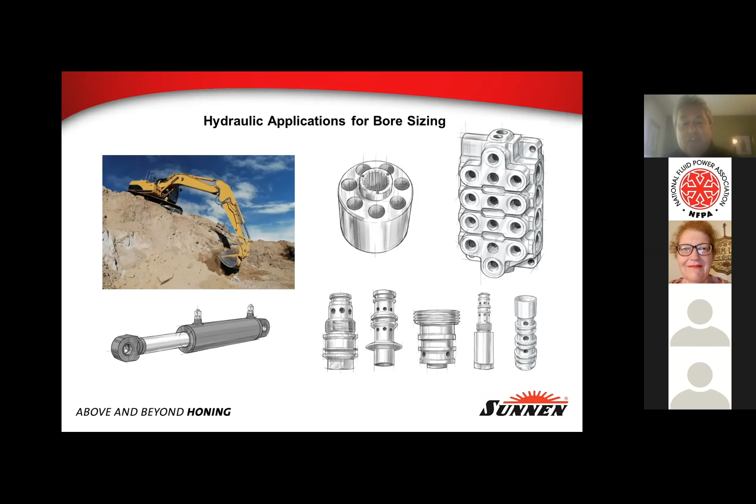As Tom mentioned, we're going to talk about hydraulic applications for bore sizing - wobble pumps, cartridge valves, spool valves, hydraulic cylinders all fit the bill. I like to tell people at a barbecue or party, when they ask what Sunnen does, I always tell them we make holes better. With hydraulic valves, piston type pumps, and cylinders, as all of you know, there's a demand for closer tolerances, better fits between the piston and valve and the bore to reduce internal leakage, improve the performance of the component, as well as having surface finish control for seal life and performance.

These design goals can be achieved with a variety of bore finishing methods. These are all secondary machining operations, obviously, after you've machined the part in a CNC machine. Then you can move to a honing operation or grinding, etc.

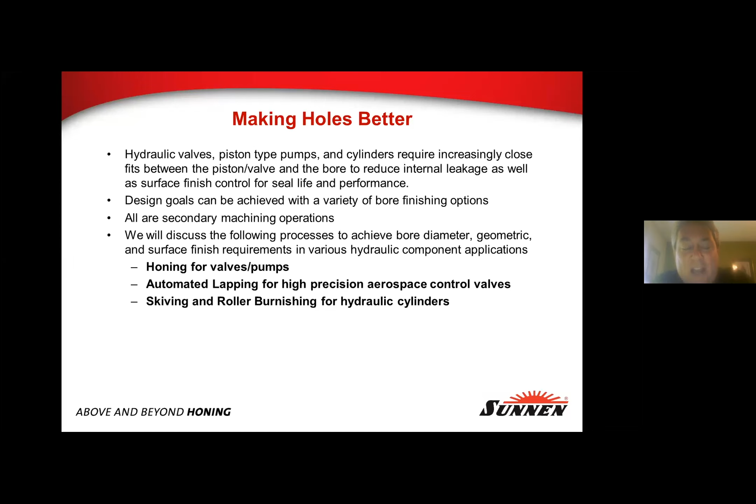So in my presentation, we're going to talk about some of the products our company produces. We've been in the honing business for 96 years - 4 more years and we'll hit that 100-year mark. We're still privately held, headquartered in St. Louis, Missouri. We've branched out into automated lapping for high-precision aerospace control valves, and also skiving and roller burnishing for hydraulic cylinders.

I like to start out presentations with a slide - many of you know this already, but I think it's interesting - about what is a micron. Of course, being 59 years old and growing up in a variety of industries, I would prefer 40 millionths versus a micron, but it just gives you an idea, from a human hair all the way down to somewhat applicable now, viruses, and how they compare in size, helps put in your mind what we're talking about when we get into these tolerances.

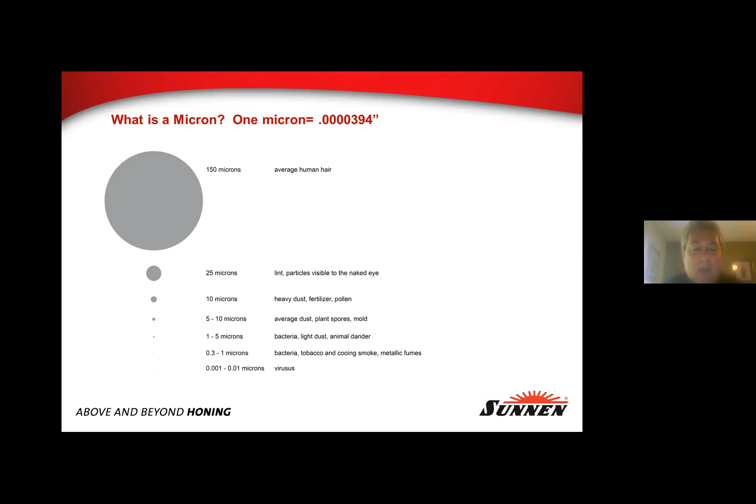So as I mentioned, honing is a secondary abrasive machining process which follows the hole creation to achieve better bore geometry and surface finish. It's an effective alternative to ID grinding, precision and hard turning, and reaming. There are actually 2 types of honing - many of you probably have both types in your facility. There's what we call single pass or single stroke hone, and then multi-stroke honing, which is the classical type of honing.

The selection is dependent on several factors, which we'll get into later. Honing can correct numerous bore conditions, but it cannot change the center line of the part. The tooling follows the center line of the part. It can create a desired surface finish. The honing solution can be extremely simple or extremely complex, depending on the part requirements. The key parts of this process all have equal importance.

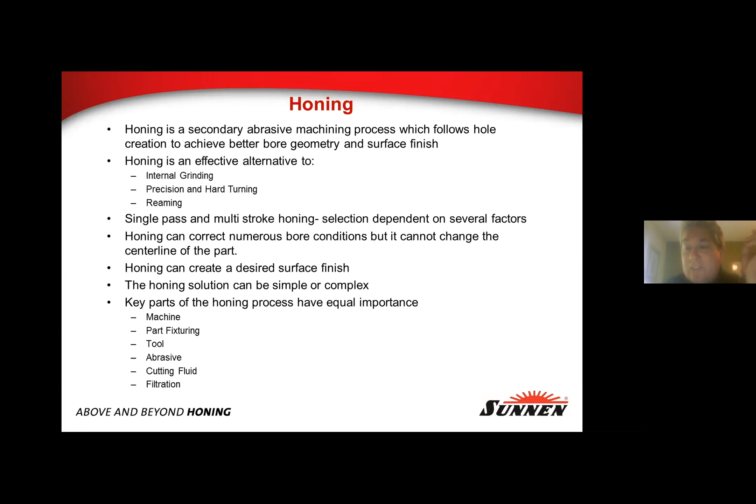My favorite part, the machine, of course, part fixturing, the tooling selected, the abrasive for the job, very important, the type of cutting fluid, and then cutting fluid filtration.

This chart, and the next two slides, talk about typical honing capabilities, what we see in the marketplace, the competitors, what the state of the art is at the moment. Diameter range, 60 thousandths to 60 inches. Bore lengths up to 47 feet. These are typically large pieces of tubing for the energy industry, which of course is not doing well either at the moment.

These are big pieces of tubing that are honed out for instrumentation purposes. Bore configurations: open, keyway, blind holes, multi-landed as with many valves, ported. Materials from Alnico to zinc, hard and soft steels, aluminum, zirconium, then exotic alloys, titanium. We hone carbide, glass, ceramics, and various types of coatings. We're actually doing a lot of work in that realm at the moment.

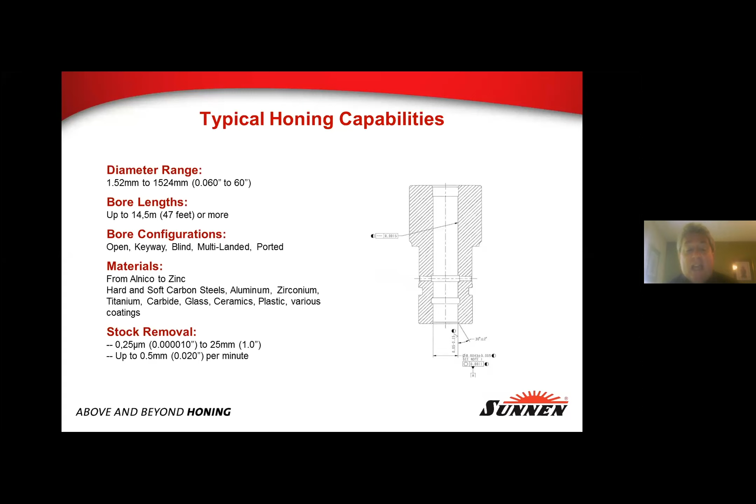Stock removal can be 10 millionths to an inch, up to 20 thousandths per minute. Size control: this is where honing can help make the hole better.

We can hold tolerances to about 50 millionths. To back up a little, it is very application dependent. Many factors play into what you can do, from how tightly you have to grip the part to remove the stock, which can cause distortion, affecting all of these characteristics.

Roundness to 30 millionths, straightness to 65, cylindricity to 80, and then surface characteristics. With RA, RZ, we can create plateau finishes, often used in the automotive industry. And crosshatch angle: we can control that with honing to 20 to 120 degrees, plus or minus a degree, for oil retention in the bore and seal life. We've even had difficulty sometimes with customers with seal noise in a hydraulic cylinder.

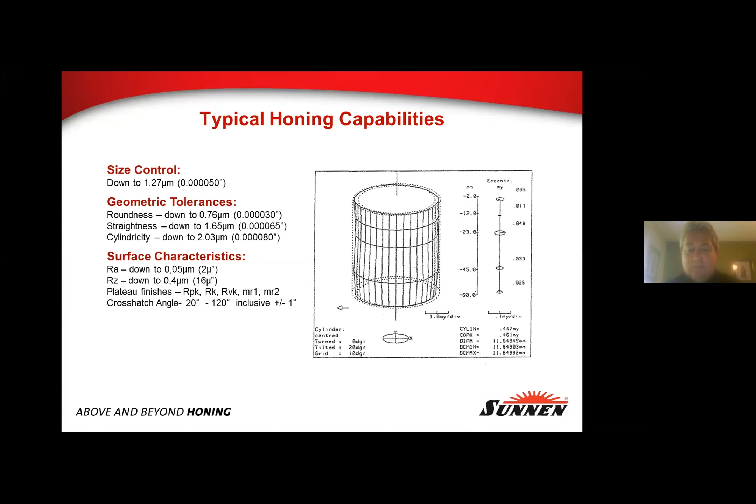These are some of the typical bore conditions that can be corrected by honing: barrel shape, bell mouth, boring marks, tandem bores. As mentioned, it follows the center line, but you can help create straightness with those bores. Out of round conditions, what we call rainbow, reamer marks, tapered parts - these are all coming from the upstream process. Undersized components, obviously, and waviness in the bore.

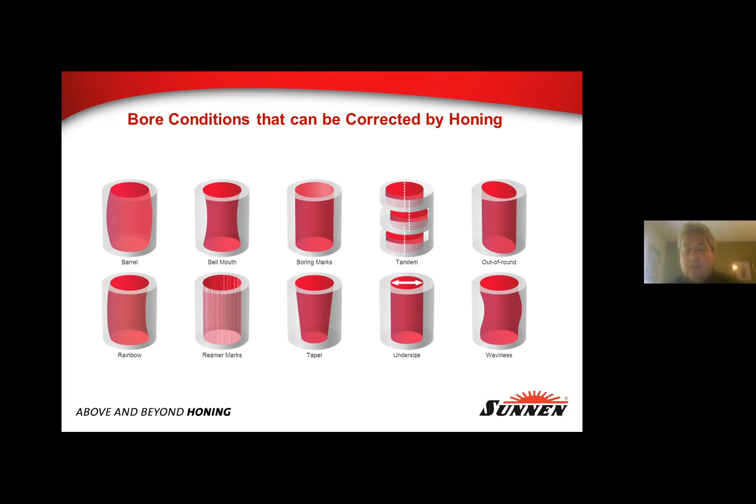Now, as I mentioned, there are two different types. Multi-stroke, which is classical honing. Either the tool or the part has to float in honing. The part is then fixtured or held in place to react out the torque imparted by the abrasive working the bore. The tool comes down and moves into the bore.

It's rotating. The tool is also stroking back and forth, and the abrasive is being expanded by the machine through a variety of different feed systems. So you've got three things going on at once while it's going up and down in the bore - that's where the material removal occurs.

At the end of the cycle, whether you're honing to time, or using our automatic size control system on some machines where a hardened carbide plug drops in and shuts the machine off when it gets to the right size. We also have air gauging integrated in, where the air gauge feeds back to the machine that it's at the right size. So there are many methods of doing that.

Obviously, basic things like just stopping and measuring the part in some applications. Depending on the amount of stock you need to remove to get the bore to the correct geometry and surface finish requirements, you may have multiple operations - a roughing operation, then a secondary finishing, sometimes a third finishing operation, and even an abrasive brush run through the bore, especially with ported parts, to clean any burrs that accumulated in the ports, which affect fluid flow. So it's dependent on your part and requirements whether you can do it in one step or maybe four steps.

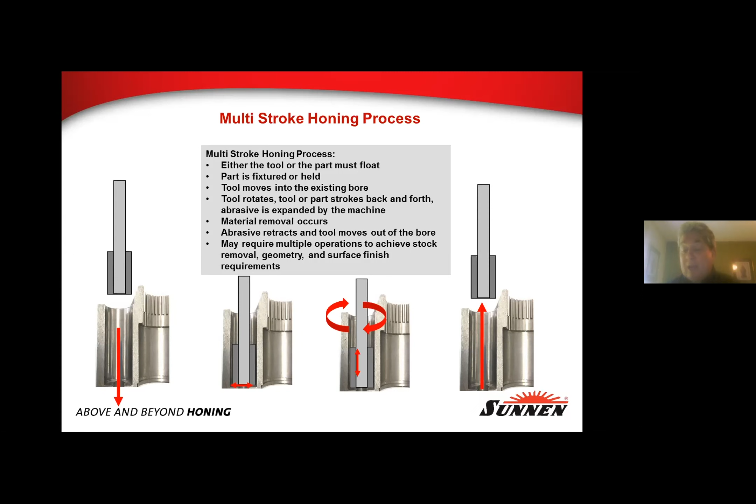Now I'll talk about single stroke honing. Single stroke honing - hey Phil, we have a question.

A question came in through the chat: what is plateau finish?

I've got a slide on that coming up, but what it is, you'll have a bore where the abrasive has created grooves, valleys, and what you want to do, as I mentioned, typically in internal combustion engines for piston rings, is knock the tops of those peaks off. So after honing, we'll take an abrasive brush and go up and down in the bore a couple times, and that cleans off the tops of those peaks. It does not typically affect the crosshatch, depending on the abrasive being used. But it's typically used for piston ring sealing in internal combustion engines.

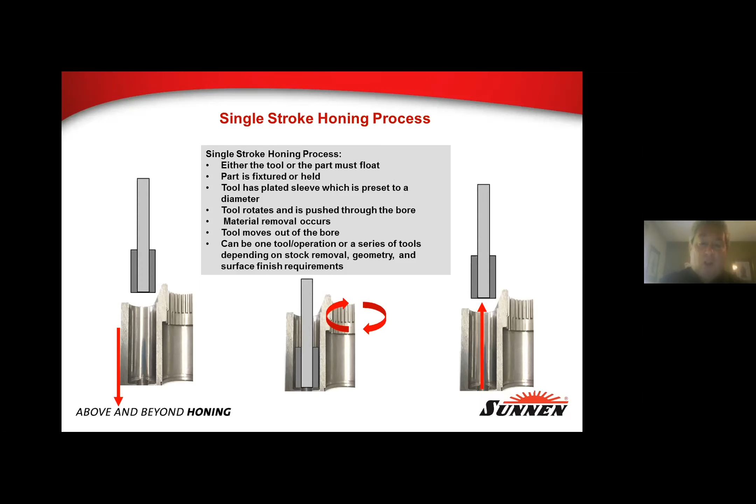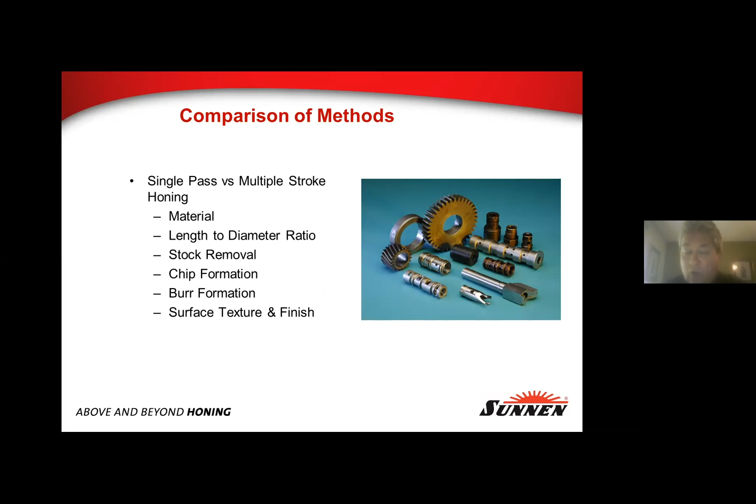So a comparison of the methods, single pass versus multi-stroke. The things that come into play are the part material, the length to diameter ratio, the amount of stock you want to take out, the chip formation that occurs—which is material dependent and stock removal dependent—burrs, which are critical of course in hydraulic components, and what type of surface finish and texture you're wanting to hold, because there are limitations.

With multiple stroke honing, materials are really the gamut, depending on the abrasive selected. With single pass honing, what you're looking for success is materials that produce small chips—and we'll get into why that's important—those are cast iron and powdered metals, which are excellent candidates for single pass. Ceramic, glass, graphite, you can envision that they all produce small chips when you're machining through that. Now limitations are softer materials: aluminum, brass, stainless, Inconel.

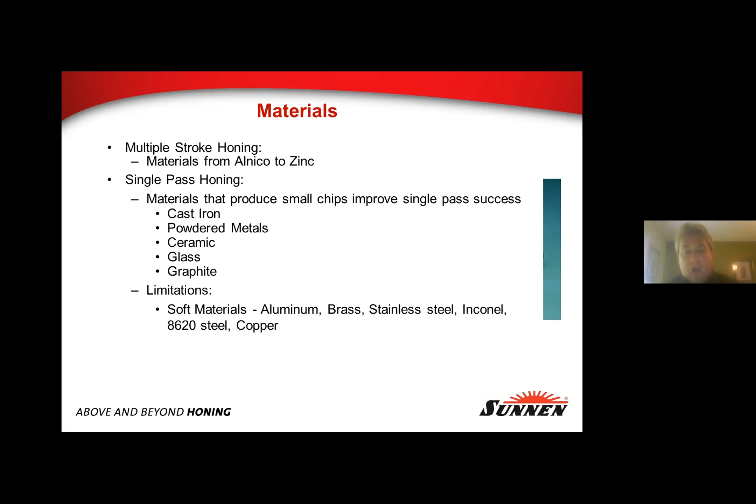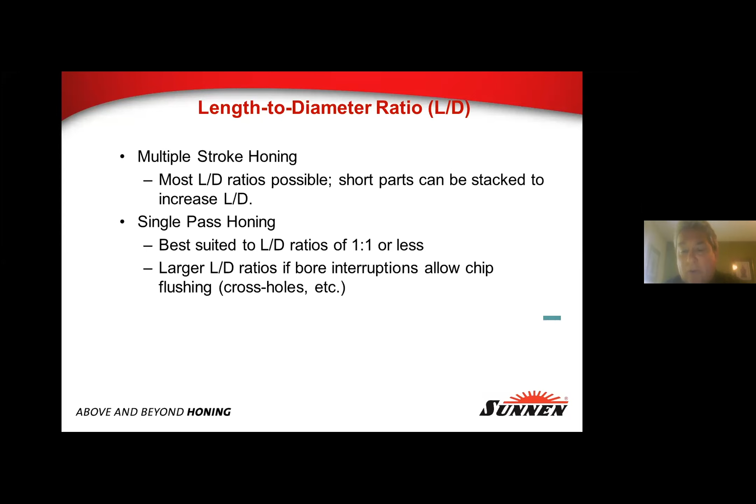These cause stringy chips, which cause problems for single pass. Length to diameter ratio: for multi-stroke honing, really anything's possible. If you have very short parts, for instance a connecting rod for a small 2-cycle gas trimmer or chainsaw, the part can become unstable. However, you can stack them, same with gears. So with multi-stroke honing, it's very flexible depending on the fixturing. With single pass, it's best suited to length to diameter ratios of 1:1 or less. Larger ratios, if there's bore interruptions, allow chip flushing through the cross holes and such.

Now, burr formation, which is very critical especially with hydraulic ported components. The least burr is with vitrified abrasives and multi-stroke honing - that's your least risk of creating a burr. Larger burrs are with metal bond abrasives and multi-stroke honing. The largest burr created is with a single pass diamond hone.

With honing stones, we'll get into more detail in a bit, they wear away and are constantly exposing new grit, which continues to cut. So you've got multiple layers of free cutting grit being exposed. Whereas a single pass diamond tool has one surface of diamonds which have been selected depending on your stock removal and the surface finish you want for the part. As I mentioned, you may do it with one pass, or you may take 6 passes of that part progressively getting bigger. The single layer of plating cuts less freely as it wears.

As you can imagine, you've got this layer of pointy diamond that works great when it's brand new out of the box, cutting away. As wear occurs with the diamond, it doesn't pull the diamonds out because there's nothing under them to expose new diamonds, just a single layer. Then it becomes harder cutting. The surface finish can become finer with this, and you get burrs in hard and soft materials that form, especially in your ports.

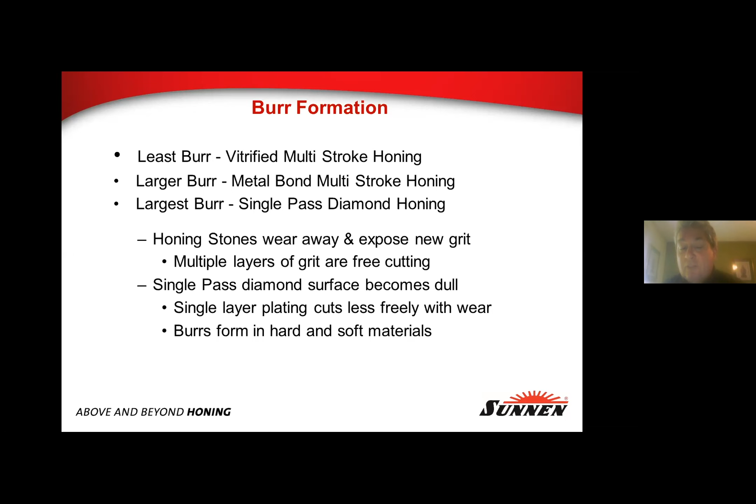So surface finish, with multi-stroke honing, as we mentioned, you can control the crosshatch if you have requirements for seals. You've got good bearing surface and oil retention. And as I talked about how the abrasive works, it's consistent over the entire life of the stone and the tool. Whereas single pass honing, you get a tight helical surface texture pattern, which is very evident when you use this for parts, and it may be acceptable - progressively finer surface finish as this single layer of diamond gets worn smooth.

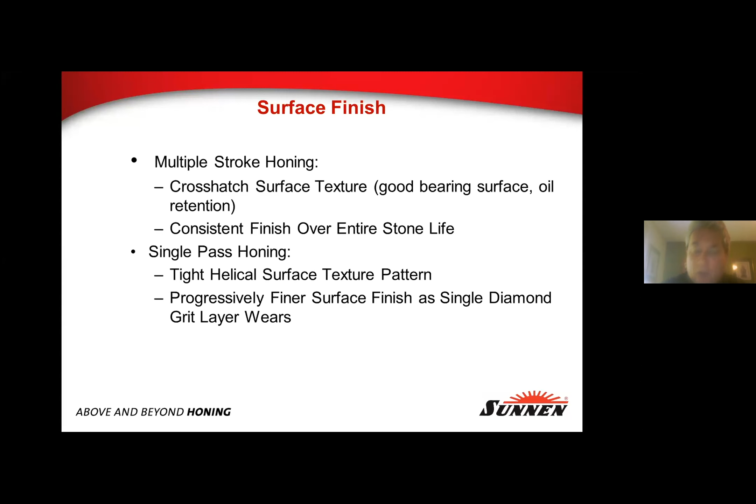So back up a bit. If your part is a candidate for single pass honing, it is by far your lowest cost per part. As I mentioned, out of a good set of tools you can get 100,000 parts, but you just have to be careful - and our application experts can help with that - is the part the correct candidate for this type of operation, or do you need to go with the multi-stroke operation?

Now we're going to get into the bits and pieces of the honing solution, and my favorite part, there's lots of machines. So you've got horizontal machines, vertical machines, tube honing machines, as I mentioned before, and those can be used for hydraulic cylinders, either production or repair, as well as in the energy industry with these huge pieces of tubing used in oil wells. And then you can actually have a human who's the honing machine. For some applications, very large parts and repair, you can take a drill and you're the machine, stroking it and honing the material out with a portable type tool.

The selection depends on the following. The primary thing is, what is the required process to hit your dimensional requirements and your surface finish requirements? It could be one step, it could be 4 steps as we talked. The part shape, size, and weight - obviously if you have a part that weighs 30 pounds, some big cast iron spool valve assembly, you can't put that on a horizontal machine because the weight of the part would be difficult to fixture and keep. The weight would not be working with you. You'd want to work with the vertical application.

Production volume: you can have a small manual machine, maybe you're making 10 parts in your prototype department - you just need something flexible to make a few parts - all the way up to creating hundreds of thousands of parts annually for high production work. Tooling requirements, the same thing - we'll get into that in a bit too. There's tooling that's well suited for low production runs, and then you've got extremely high production tooling that is hardened, machined, with super abrasives used in it that can last for hundreds of thousands of parts before it needs to be reworked.

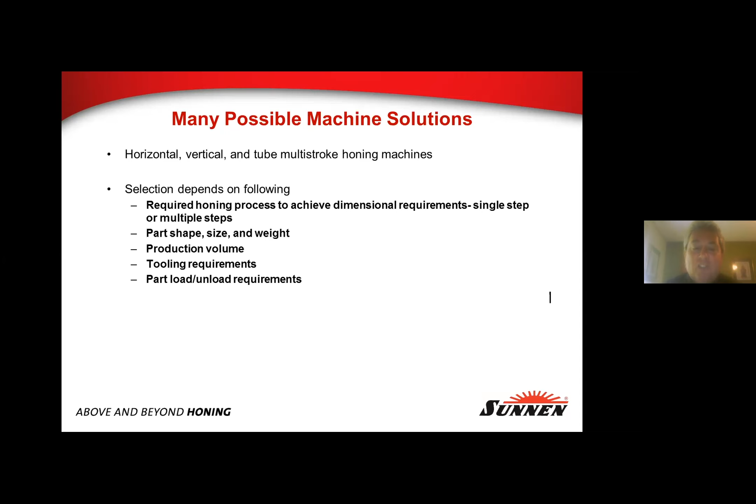So this recipe, if you will, is critical on so many different things that have to be analyzed to create the most cost-effective solution to make sure that your costs are minimized to create the part that is for your application. I've got a few slides here just showing from our line of machines to give you an idea of the variety.

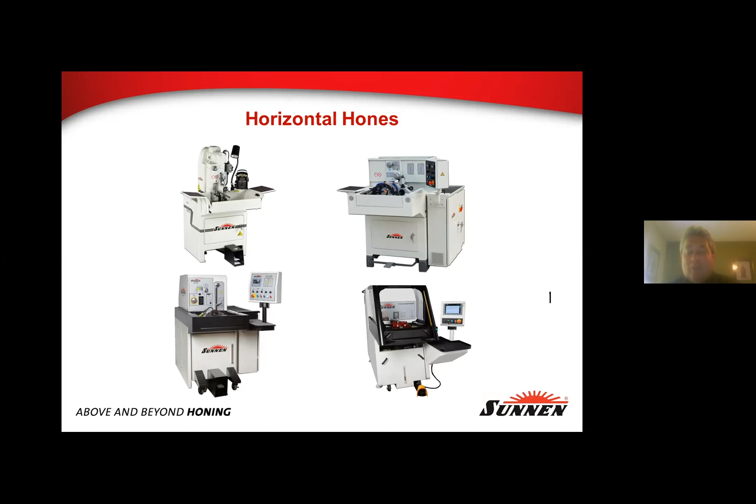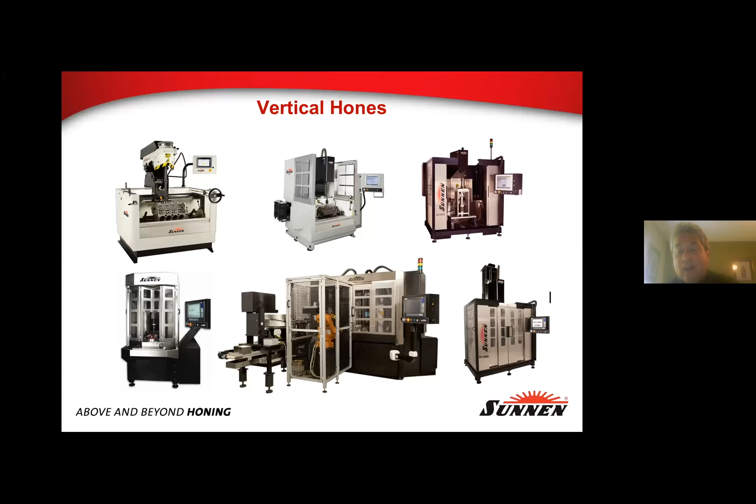Then we've got in the middle at the bottom an automated solution. That's a 3-spindle machine because that's the number of steps it would take for this particular component. We've got a robot, we've got a pressing station, perhaps a cleaning station.

And then I talked about tube hones. We make a variety of tube hones, as do our competitors, for different applications.

Now we'll get into the real key to success. The abrasives, tooling, and cutting fluids, these are all working together.

And just to give you an idea of the complexity, and this is just at my company, we actually have approximately 7,200 different types of tools you can order, 21,000 different abrasives, and 19 different water-based and oil-based coolants that are required. So once again, it gets back to your application and honing in, no pun intended, on the right solution.

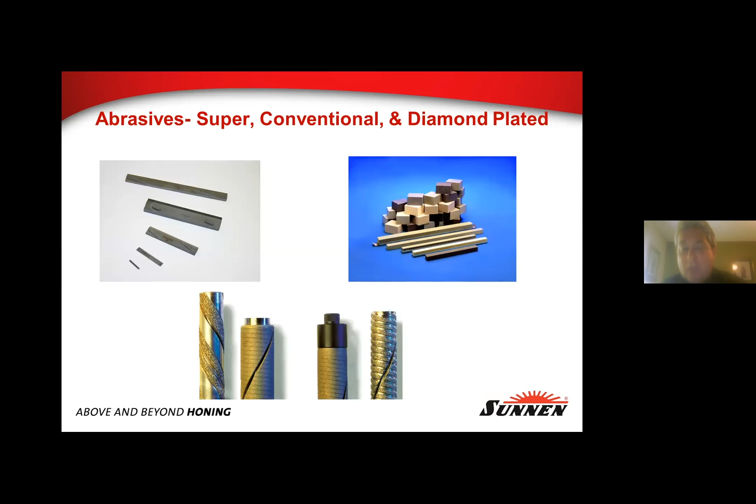The tool third in from the left, you can see the adjuster, which there's a taper, and you adjust as the diamond wears. You manually turn that cap up, if you will, to drive that abrasive sleeve up a little bit further to maintain your size until you wear the tool out.

The abrasive stone consists of a mixture of abrasive grit particles at a certain size, depending on the surface finish and stock removal requirements, and then a special bond that holds that all together, a glue, if you will. And we have different bonds and different hardnesses of bonds.

Each of those many small abrasive points that are on the stone are exposed as the bond wears away, and I've got a slide that kind of shows some of that in a bit. That bond is made so that as the grit becomes worn down, the forces go up on it, and the grit will actually pull out of the bond. The bond wears down and exposes new grits, so you've got nice new sharp teeth underneath there ready to take the place.

Now this is where you get into what we call swarf, or many of you, if you've been around honing machines, the mud that comes out of them. That's a combination of this abrasive wear as well as the material that you're honing and the bond that's wearing away. So these abrasive grit particles are performing the cutting action. As I said, they wear down, pull out, and expose new grit until you've worn the stone out.

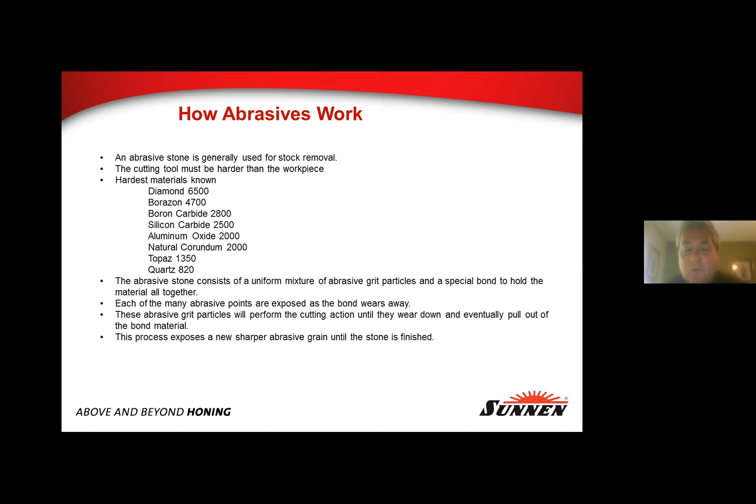That's a good question. It really depends on what you're doing with the tool. We have customers doing very high production work, and we make a line of tools we call MMT tools. Our customers work with us, and we've developed the number of parts after which they should send the tool back, or they can do it themselves, but a lot of them send them back into the factory, and we'll put them back in the cell that built them, and they'll inspect, grind, and replace components. The tools are designed often to have replaceable components. So I hate to be evasive, but it really depends on how much you're using it.

We provide dimensions in our catalog, like on the K-mandrels. You can take a set of calipers and check them periodically. Typically it shows up because you're having problems - you'll get stones that are wobbling in the groove, and you'll visibly see the wear in the tool. So it's really making sure your operators are attuned to problems and then getting that tool checked. We've had problems in the past with some of our really heavy-duty large tools for high stock removal in the oil industry.

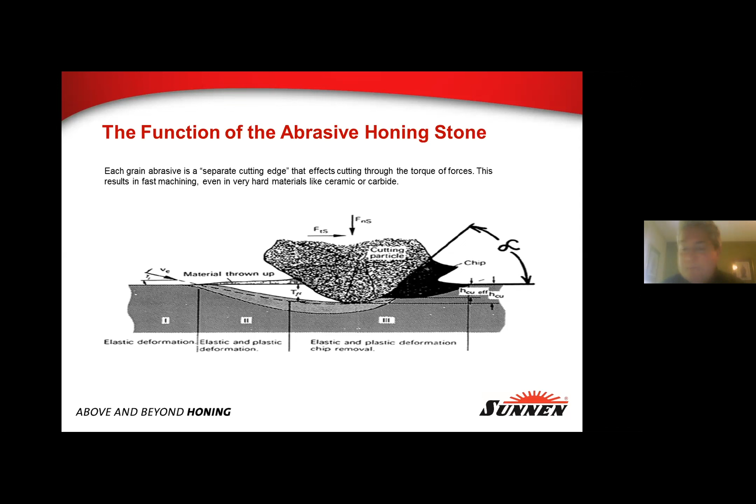When we set up an abrasive, you've got the type, which is dependent on application, how many parts, high production, low production, keeping the costs down - silicon carbide, diamond, CBN or super abrasives. And then your grit size, which is critical to the surface finish and stock removal.

You may have a grit size that's very aggressive for your first step to take a lot of stock out and get that hole rounder, straighter. And then the next step may be a fine grit to help you get that surface finish down and get to your sealing requirements. And then the hardness is actually the bond.

You have soft all the way through hard bonds. And once again, this is based on how hard you're having to push that tool. Are you taking a lot of stock out, or are you not? That bond hardness is part of the equation of how the grits are replaced as the process is going on.

Now, a lot of this we developed over the many years of being in the business. Hence, a lot of this in our catalog is based on our years of experience, applications when we look at materials.

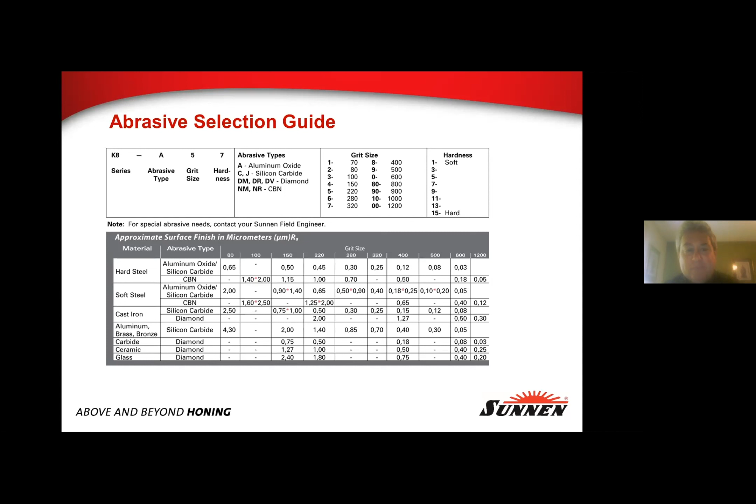So we talked about the different types of abrasives. I mentioned super abrasive. We've got what we call conventional or basic abrasives - they're cheap, they wear quickly - and we've got super abrasives that don't wear so quickly. And these are a couple of just some things that go with that.

The type of abrasive - we'll talk about the coolants here in a bit - but if it's a vitrified bond, you have to use oil. We produce water-based and oil-based coolants. Oil does the best. We make some stuff called MB30 that has animal fat in it, which works great. It was developed years and years ago, and it does the best job.

It smells horrible. You get it on your hands. You have oil on your parts, which then you have to clean off before you go to the next operation. So oil is the best, but we realize water-based had to be developed to work with our customers who don't want to be cleaning parts constantly and have the issues that go with oil. And in some parts of the world, oil's not a good thing.

We've designed our machines to not have leaks with coolant systems and such. And there are places, especially like the West Coast, that have some pretty stringent rules on the type of honing oils and coolants you can use. So the selection of that also depends on the type of abrasive. I'm getting off track here, and we'll talk a little bit more about the coolants.

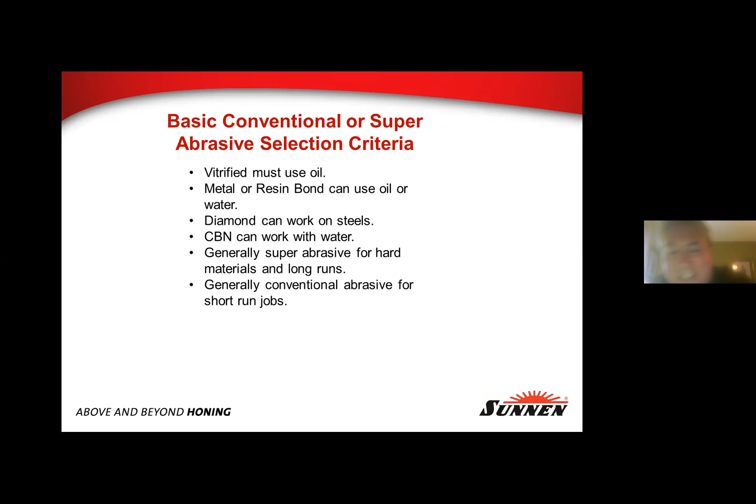Hey, Phil? Yes. Am I running out of time? You got a total of 15 minutes left, including some time for Q&A, so I might want to finish your presentation within the next 10 or less. Thank you, sir, I will kick it up a notch. Don't mean to be rude, but I'm the timekeeper. At our sales conferences, the sales manager usually has a softball, and he throws it at me in the middle of it when I'm getting too close to the end. So yeah, anyway, we'll keep going here.

I've just got a few slides to show you about the type of abrasives and materials. These are diamond - not to be confused with diamond sleeves - but these are actually diamond that can go in an abrasive stick, and some of the materials they're applicable for. Also Borazon, or our CBN, super abrasives - got to have hard material doing the cutting.

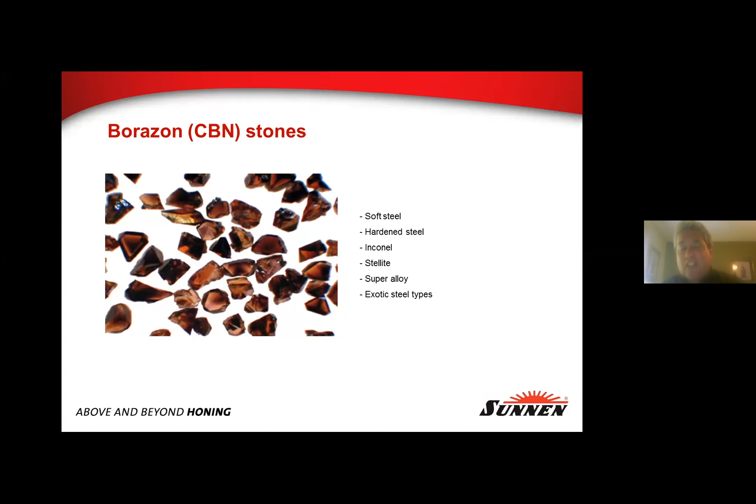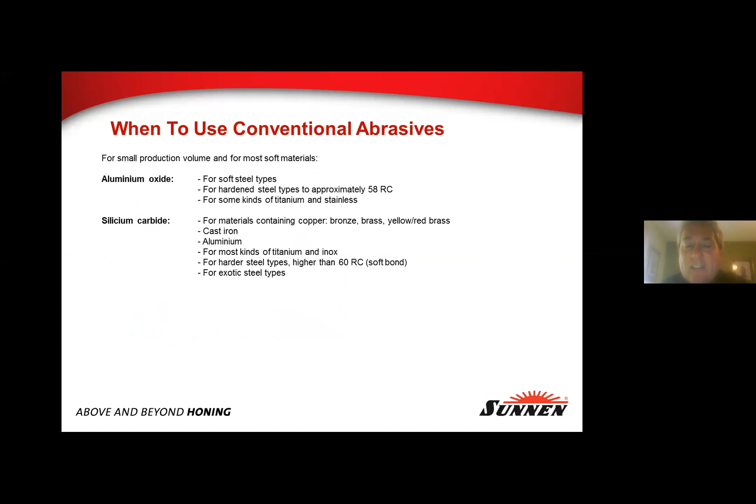Conventional abrasives we talked about. These are for low production and softer materials. They wear, but they do a great job. And sometimes they're required in order to get the surface finish and requirements that your part needs.

Let's talk about diamond plated tooling. We talked about single layer, nickel plated on, stock per pass limited by the ability of the chips to get past those grits as the tool is being forced through the part. These tools are very aggressive when new, and then the surface numbers decrease. The strain on the part goes up. The machine is using more power as the tool wears. And the performance in water is about 30% of what you get with honing oil.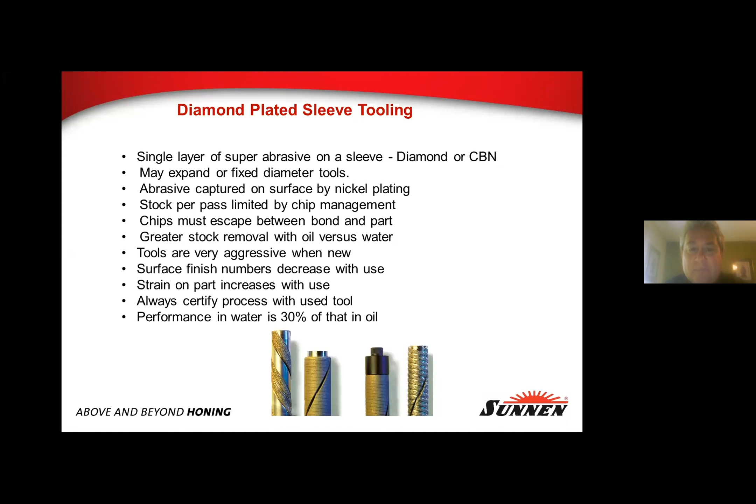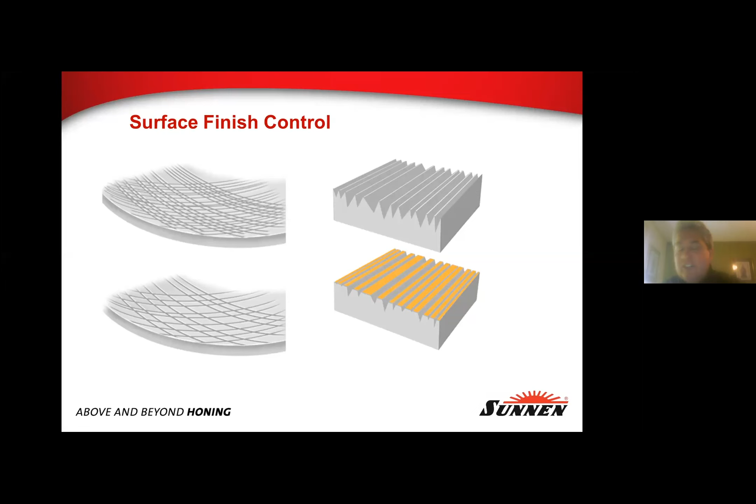We talked about plateau honing. On the right is a graphic showing that. You're knocking those peaks off, and that's typically with piston rings and engines. You want to have that area where the ring is riding in the engine block. Then crosshatch control, you can maintain depending on your sealing. A lot of your seal companies will recommend a certain RA, RZ, and the level of that inclusive angle.

We talked just about crosshatch angle. You can change that with the machine. On some of our machines you just program it in. On others, where you're doing the crosshatch stroking, at high speed you can see what it looks like. At low speed it reduces that inclusive angle, but it can be manipulated depending on your requirements.

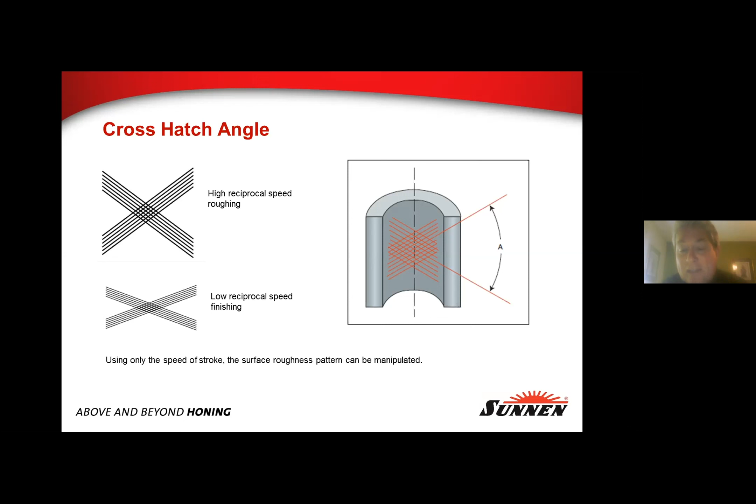We talked already about honing fluids. These are some problems we see, and the honing fluid is often a very neglected part of the process. It needs to be maintained. We have filtration units, or can recommend that for people that have centralized cooling systems. There are additives that get depleted. The water base, you get biofouling in it. And we've actually seen people use kerosene and stuff, which is not good.

I mean, there's a reason. Then you have problems. You have abnormal stone, where you have the stone breaking, pieces coming off. You'll have metal welded to the stone. And especially if you're doing it the old-fashioned way in one of our MBB machines, with your hands on the part, you'll feel it grab. That's typically due to problems with the fluid.

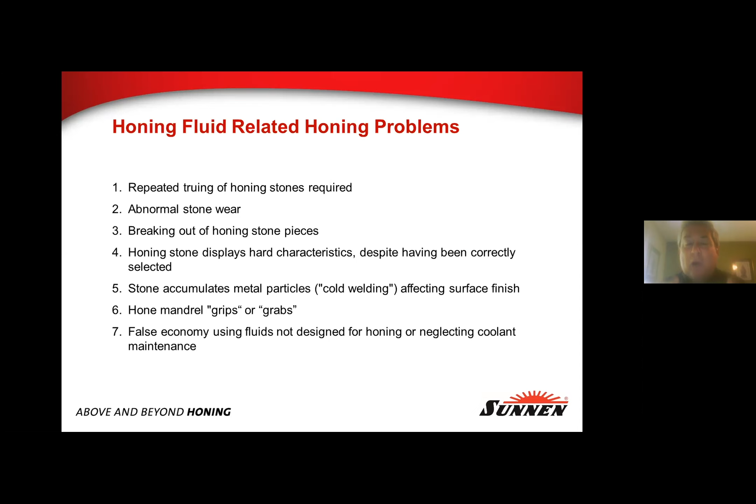When we talk about this, we make a chart called the SMOPS chart, and we give it to customers - these are just things to check when you're having problems. Is the stone right? Is the mandrel right? What type of oil are you using? Is your feed pressure for pushing that abrasive out and through the part correct? Are your speeds right?

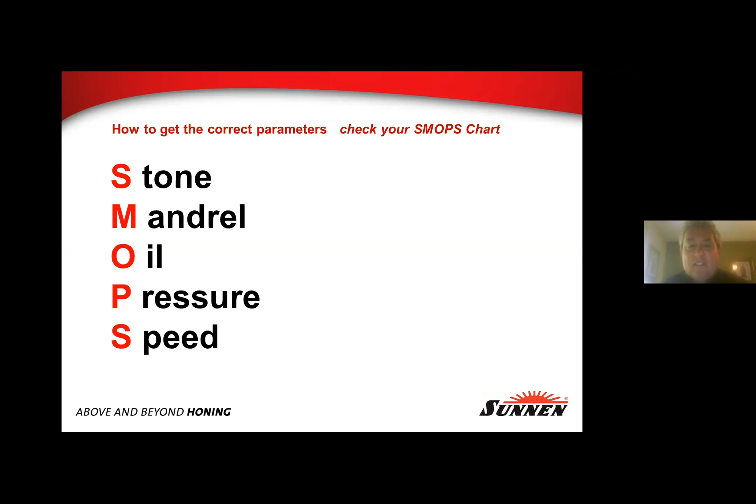Effect of varying machine parameters: if you increase the stroke speed, you cut cycle time, the stone cuts better and faster. You get a bit wider crosshatch angle as I indicated, but you get faster wear of the guides and the stone. If you up the spindle speed, surface roughness can decrease, crosshatch angle decreases, and the stone acts harder - it will vitrify or get harder sooner from that pressure going on. If you jack up the feed pressure of the machine, the honing stone will cut better and faster, but it also wears more. So you're looking for those optimum settings to minimize your part costs and consumable costs.

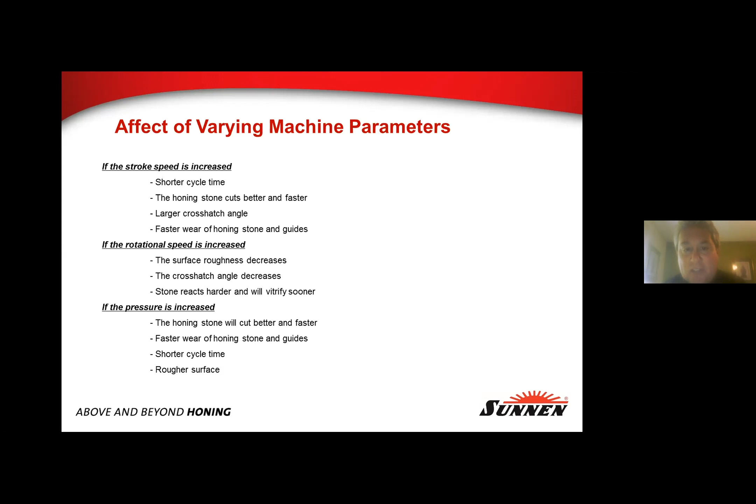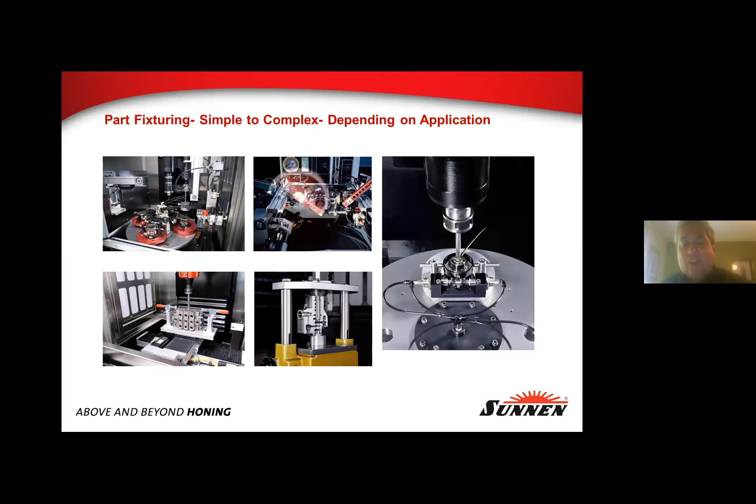Part fixturing - just to give you some ideas, you can have it, you're holding the part in your hand, all the way to some of the pictures here that are for high production solutions.

Now I've left the last two processes - at the end here I just have some overview slides. Automated lapping - so we all, I think, know what lapping is. Most of it's done manually. There are surface laps, but we're talking about bore lapping.

So this process goes beyond the core capabilities of honing. It delivers cylindricity to 60 millionths, straightness to 40, roundness to 15. This is typically a labor-intensive manual process. The unit that we developed is automated. We have some patents on it, and it was really developed over 9 years of development for the aerospace industry.

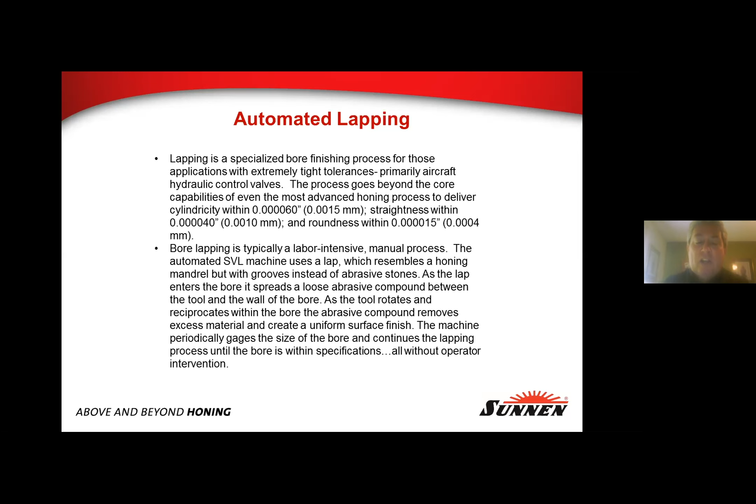These very expensive aerospace control valves, where you don't have to actually have people doing it. So the benefits are improved consistency of the finished parts, reduced reliance on people, improving safety by eliminating people's hands on the parts and machines, because a lot of these are done by feel, the human touch of feeling when the bore is right. And we're able to tighten the tolerances.

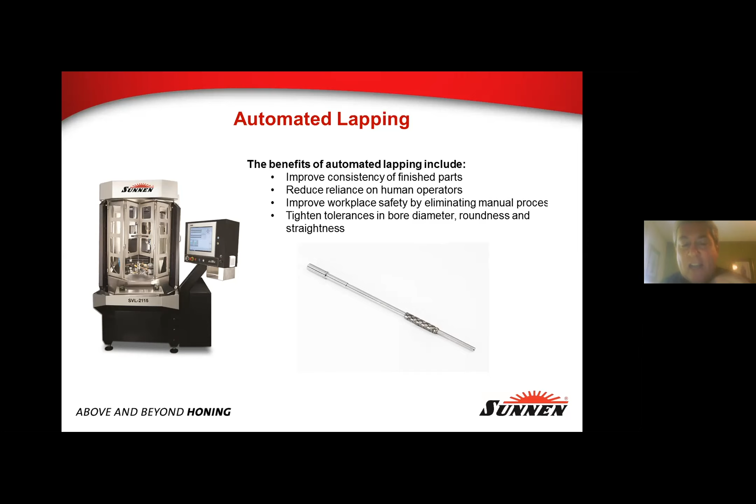That's a picture of the automated lap machine and the lapping tool itself. The machine will actually put the part in and walk away. It air gauges, laps, continually measuring the part and washing it.

Now we'll get into our skiving and roller burnishing system. For those not familiar with this, it was developed by a company, Sierra, in the 70s for speeding up and replacing honing machines. We competed with this for many years, and hence why we brought it into the fold. It's really geared towards very high volumes of tubes.

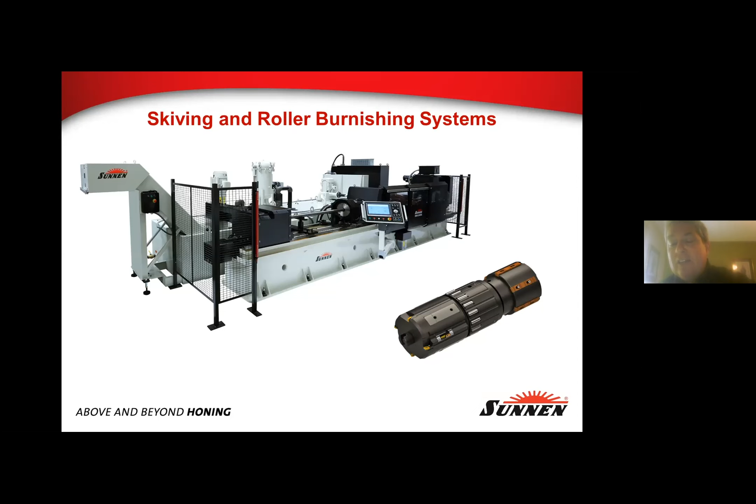How the tool works is you've got two parts when you're looking at that tool. You've got cutters on the front that are skiving, taking that material out, and right behind it are rollers, hardened rollers that are smashing down those peaks and valleys from the skiving, the cutting, and creating a mirror-like surface finish.

As I mentioned, this was developed in the 70s. This is 70 to 80% faster. There was a newspaper article, much to our chagrin, many years ago, that at the John Deere plant, 2 skives replaced like 23 honing machines. So it can hold diametral tolerances to 1,000th.

It is a very large investment. This is not for the faint of heart with capital expenditures, and it is for very high volume tubing production. But it more than pays for itself if you've got that application.

With these 2 processes and the tools I mentioned, I went over what you can do. The surface finish can be an issue for seals sometimes. It's a mirror-like finish, and there really isn't much you can do about it because it's created by those rollers. You do get a residual stress layer from the burnishing that gives you good wear for your seals and your piston and your cylinder.

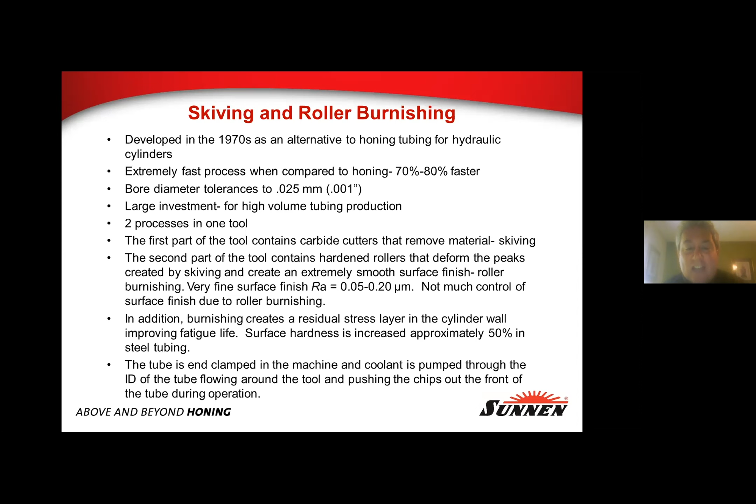How it works is you clamp it in the machine, the tube on either end. You're flowing huge amounts of coolant through that tube around the tool and pushing all these chips, because you're talking perhaps a 2-foot, 3-foot long cylinder being done in a matter of seconds, 30, 40, 50 seconds. So you can imagine the chip load.